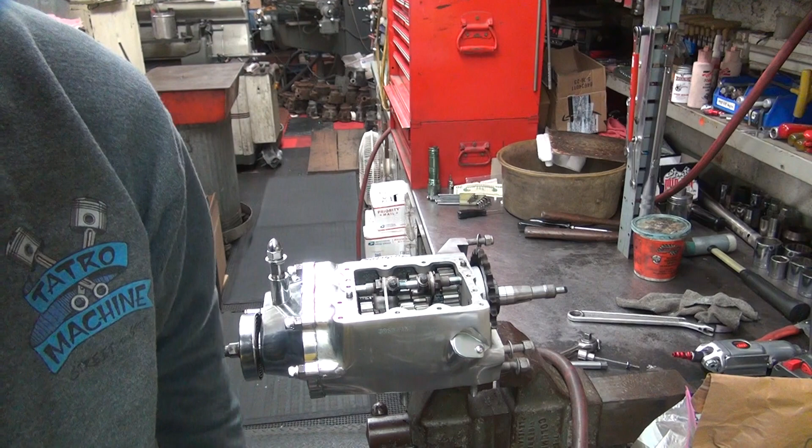Alright, we're back. We're going to put the top cover on now, so we've got to get our gasket gooped up. And the cover's over here.

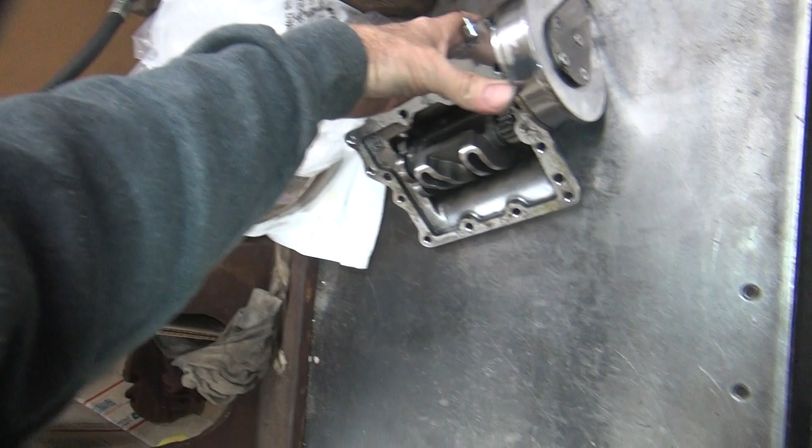Already trial checked to make sure it all shifted okay before. Right now we're in neutral. So we've got to make sure that this is in neutral over here. So that's in neutral, that one is in neutral. Make sure your bushings are on here too, like they're supposed to be. So those are all in there.

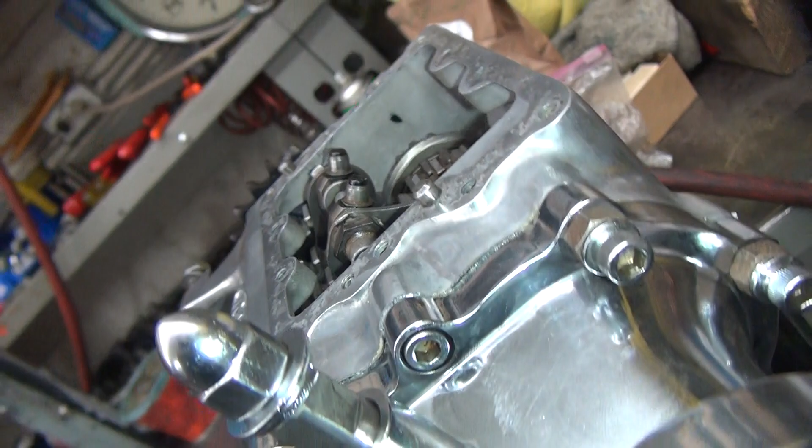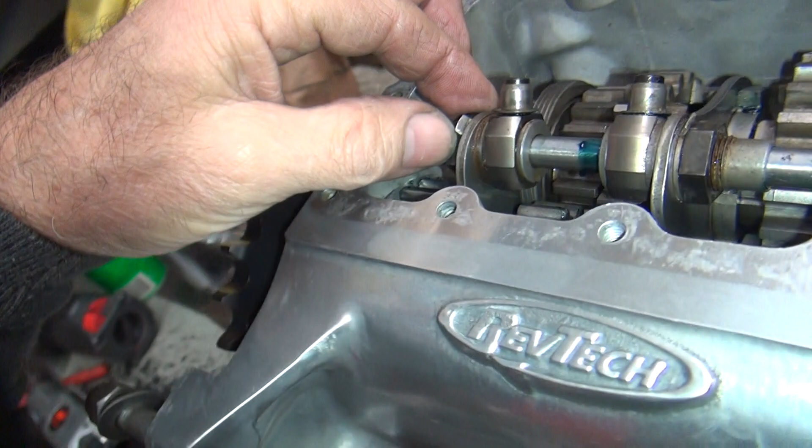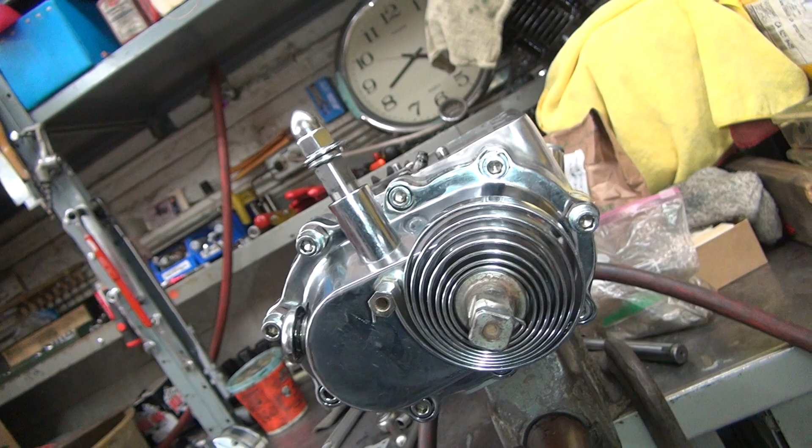Now why are our forks at different angles here? They're not supposed to be at different angles like that. That's weird. That is not good. Huh. I didn't notice that before. That's at a completely different angle than this one. They are not supposed to be at a different angle. That means something is put together wrong.

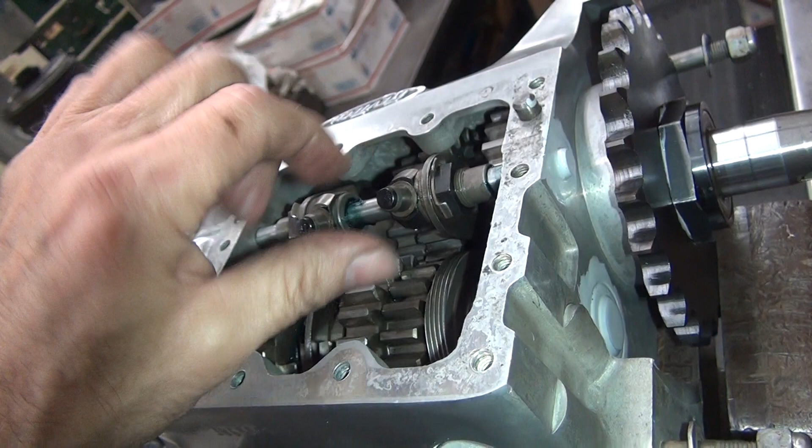That is not good. It's a hell of a time to find out about that because it's all buttoned up. I've got to completely pull things apart to change that out. These here can go on in two different positions, 180 apart from each other. It'll change where the angle of this is. So I'm guessing this one's wrong. It's too low. This one looks more correct.

So if these are in the wrong angles, they don't engage up here correctly. That means I've got to undo the sprocket, pull this goop all off, put it back on there, and then I've got to redo the goop too. But yeah, that's a hell of a time to find out there's a problem. This one's so darn low, it's not really going to engage correctly.

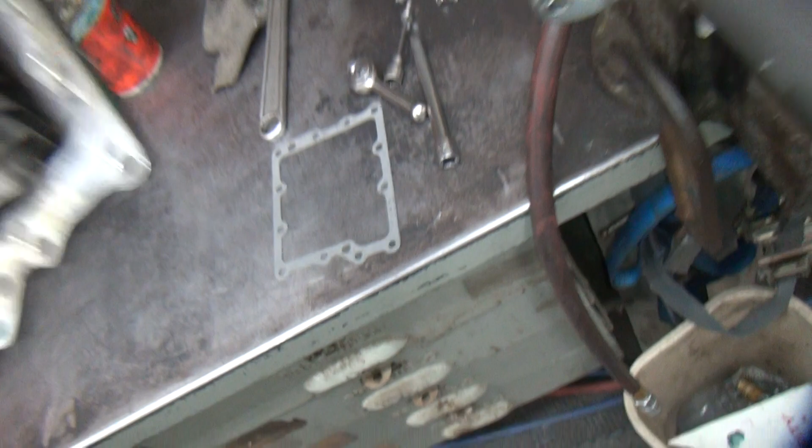See how it's not going directly into the drum? It's angled way forward. This one over here, on the other hand, is probably going in a lot straighter. Even it's a little off too. Yeah. That one's way off. Well, that's a sucker.

Nothing like having stuff put together wrong. These were put together wrong. I didn't notice that before. I should have noticed that. It's pretty obvious it's off. Oh well.

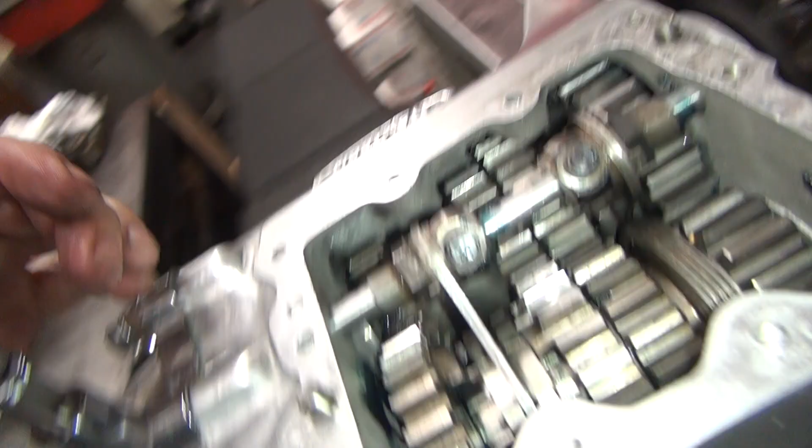Time to redo stuff. Okay, I'm going to have to go find me a book and double check on what that's supposed to be. One time a service book comes in handy. If I had to guess, this one's off, 100%. This one here is off. And there's no way of fixing it until you take the whole shaft out, which means the sprocket has to come off too.

But luckily all this other stuff doesn't have to come off. It's going to be a little bit harder to get the shaft out with all that glue on it, but I'll manage. Hopefully. The pin for getting that is over here, so hopefully I don't have to pull that back off too. Alright, yeah, I'll be back.

Okay, I've got my service book here. This is the genuine Harley one from 1974. And this one here is one of Dad's old copies he used to sell. I've got a few left too. These are the Knucklehead book from '40 to '47, service manual.

So this book didn't have squat in it. If you can't find what you need, go to an older book - that's the key. This book here talks about the shift forks, but doesn't talk about how they're supposed to be. So if you go in here, read all about it. There's the forks out.

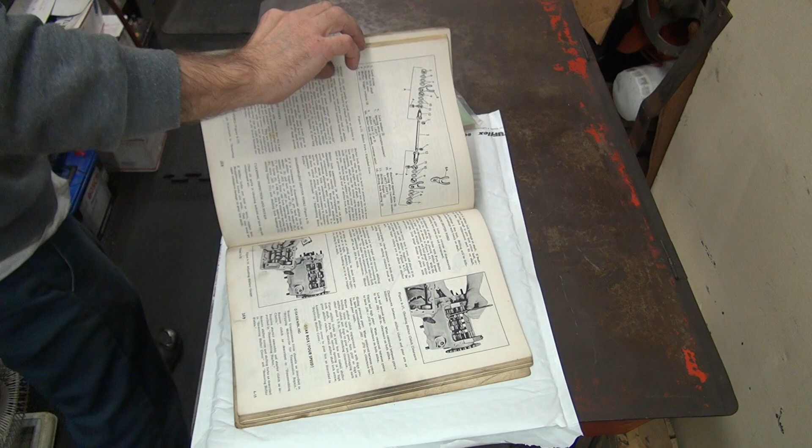Shift forks right over here. So they talk about... problem with old books is you don't want to fold them down too far, they break the spines out of them. Let's see, I'll put this over here.

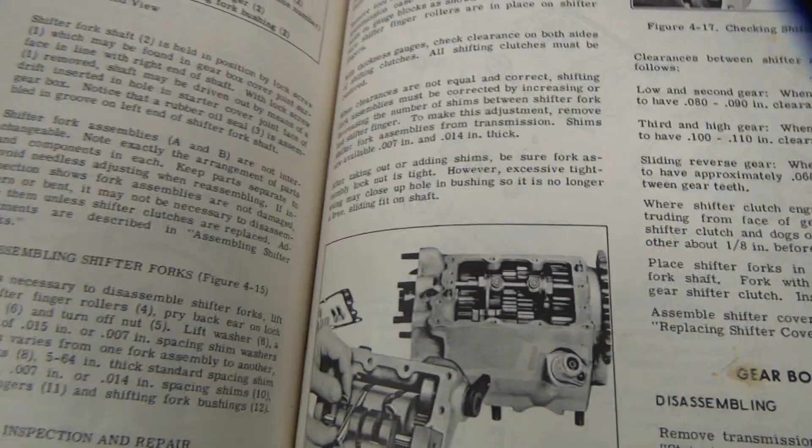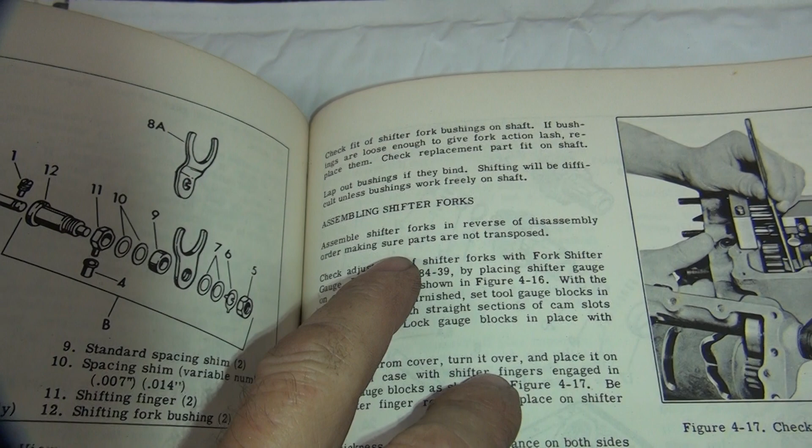There we go. I'll turn the light off. Yeah, maybe have it on. So over here, it tells you how to take them apart, inspect them, and then for assembly it says: assemble shifter forks in reverse of disassembly order, making sure parts are not transposed.

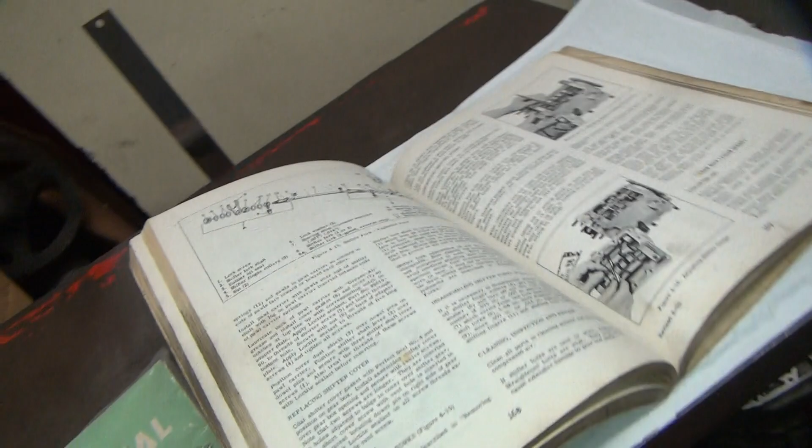Oh, you mean like flipping them upside down backwards? You mean like one of these is? That is the extent of what they tell you to do about that. They don't tell you any kind of reference on what is correct or not correct. There's no pictures, so you're pretty much up your ass - you ain't got nothing.

They're screwing you. Okay, so that's the 70s book, which is a copy of a 60s book, which is probably a copy of the older ones. But we're going to go ahead and pull out the old book. Old books tend to have more information because people actually worked on their bikes back then, unlike the new ones.

So this is one of Dad's books. These were made back in the mid-70s, up in LA - I think they're made in Santa Ana. Dad bought a bunch of these back in the day, so these are copies off an original book. It has really good pictures on them, nice glossy books, real nice quality ones.

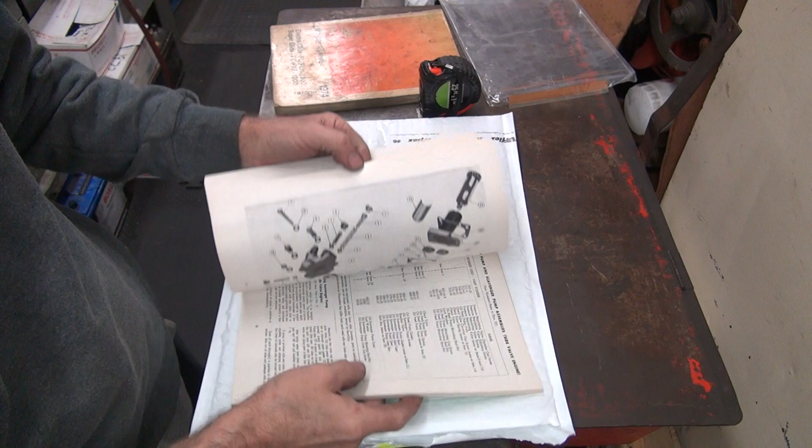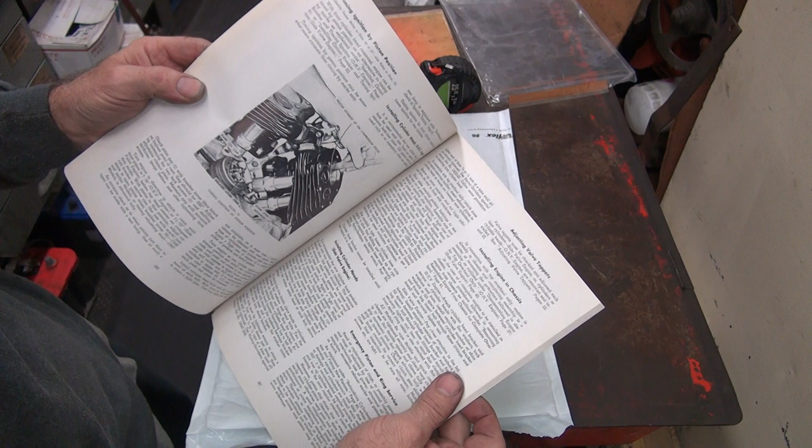So even though it's a Knucklehead book, it has a lot of 45 stuff. These pictures here are all 45 bikes. It also has the UL mixed in here too. So let's go to the transmission section. Yeah, see there's a Knucklehead right there. See, it looks like a 45 flathead, but no, it's a Knucklehead. Yeah, sure it is.

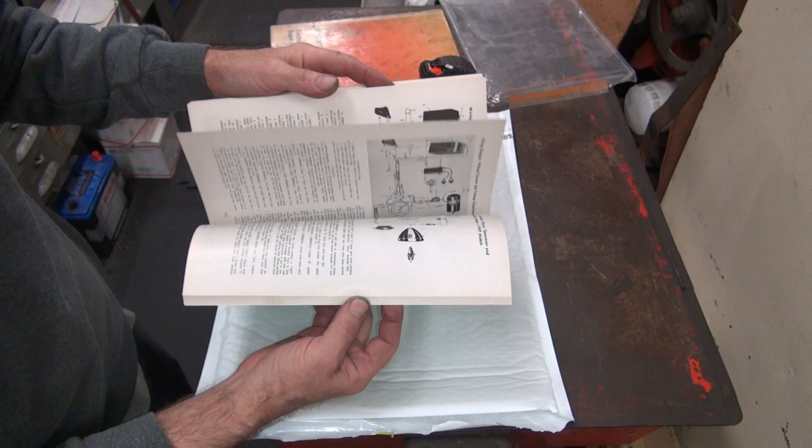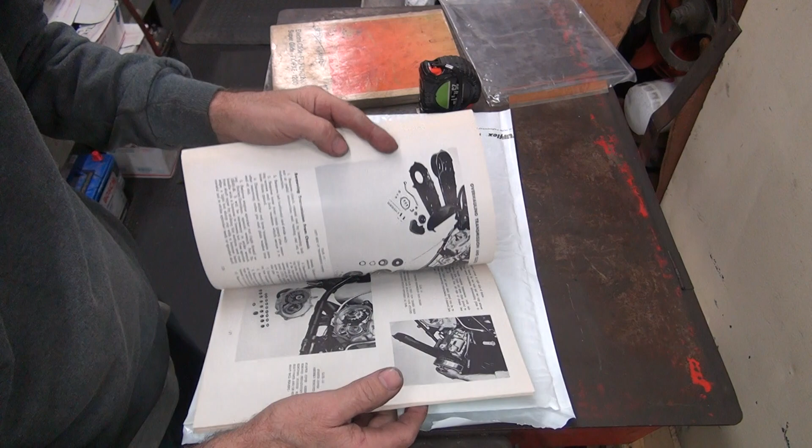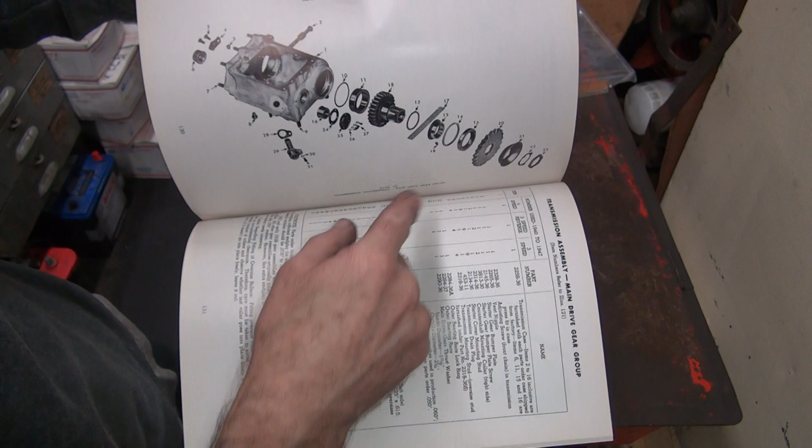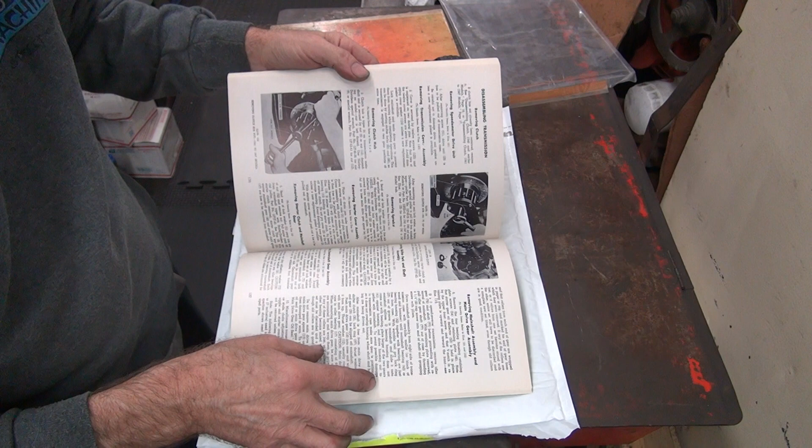Okay, let's see here. Shift forks. Removing shift fork. Removing cluster gear. Remove counter shaft. Look how nice it's laid out so you know exactly where you are. Inspecting parts. Removing shift fork shaft bushing.

Let's see - each section of cover not to exceed 300 degrees. You're not supposed to heat it up to more than 300 degrees. That's nice. Tap on it with a wood block. Clean all parts.

Here they're talking about slots and grooves. Okay, inspect all bushings and bearing races for worn or excessive conditions, give close attention to rounded condition on shifter engagement dogs and gear engagement dogs. Okay, that's about shift dogs.

Tell me what I want to know. Just telling you, looking for bad parts. We already did all that.

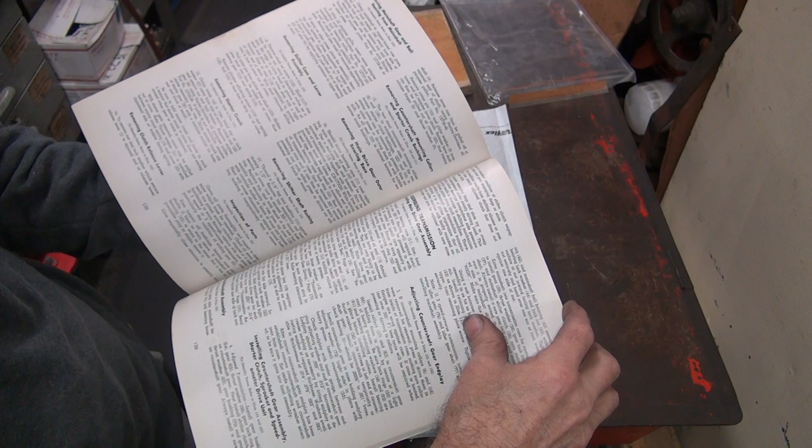Installing counter shaft, installing shift forks.

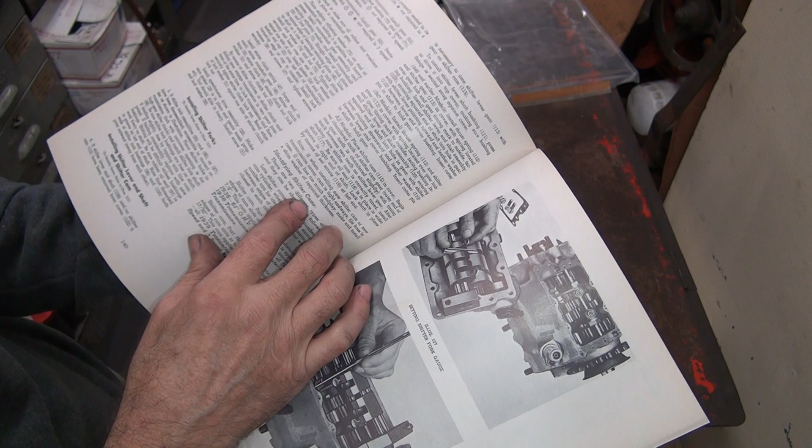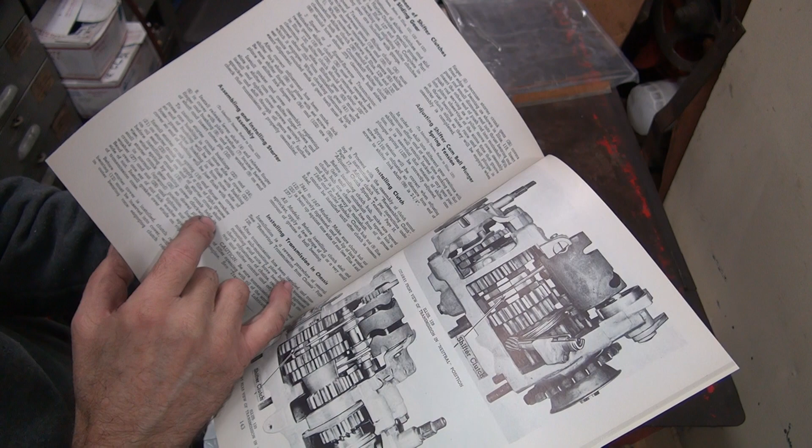They don't tell me either. We got a lot more detail in here, but it's not telling me what I want to know. It's all about the shifter cam. Yeah, I didn't really tell.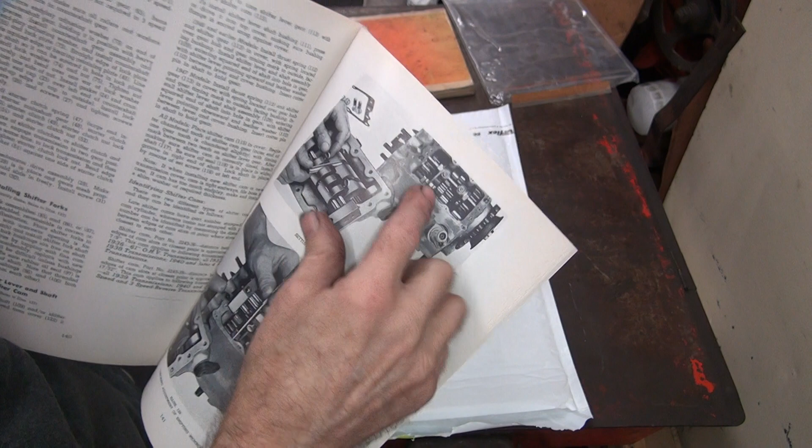They told you which way to put the bushing in on the shaft up here, with threaded parts to the outside, which we did. They didn't talk about which way the finger goes onto the bushing sleeve, which is what I want to know. That is the key.

Alright, well, let me look through this a little bit better. It's going to be a lot of reading here. Alright, I'll be back.

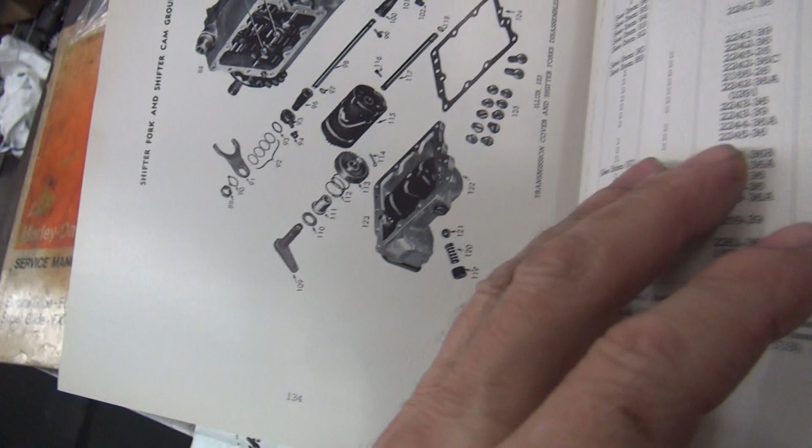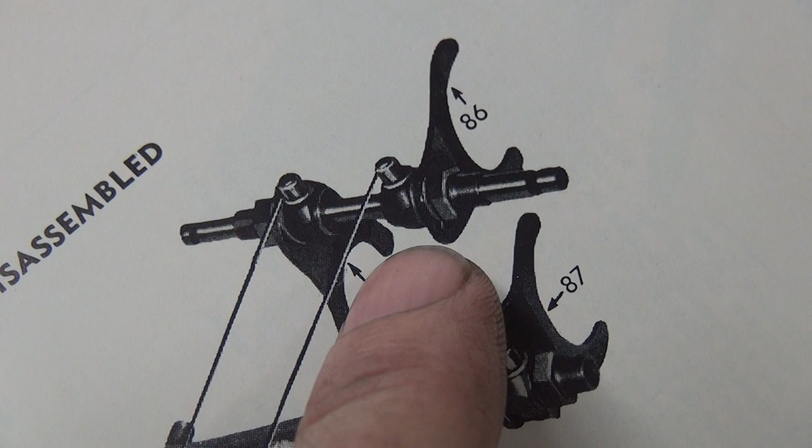Okay, so after reading all that stuff, they sure didn't tell you, but they said look at the pictures really close and you can tell which way things are supposed to be. So here are your fork assemblies right here, but you can't tell the angle by looking at a picture at that angle. You can't see what the slot is right here on that piece, or that piece, to tell which way they're supposed to go together. So it makes it really difficult to figure out.

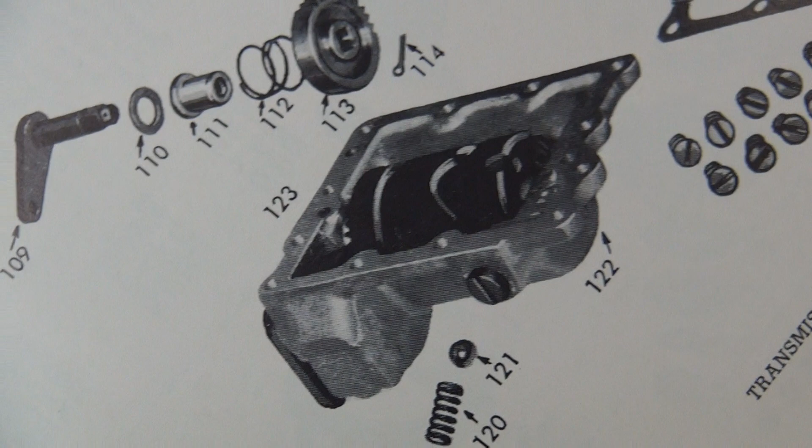Now you can see the slot in this picture here, see the slot going across, but you don't know where this one is relative to that.

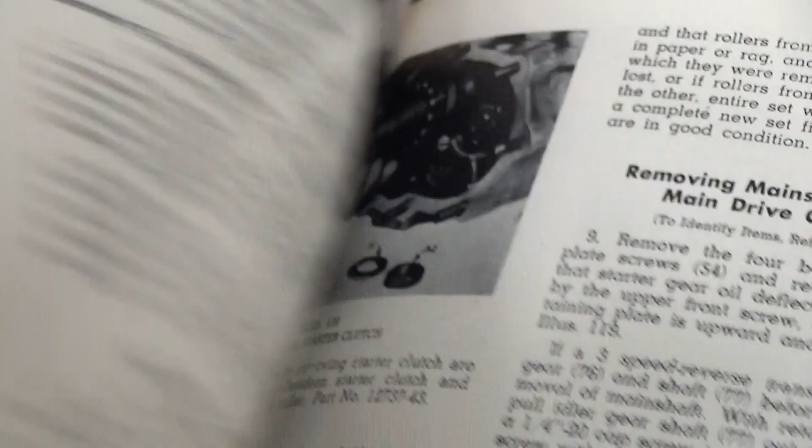They tell you how to use a 100 thou thickness gauge on the high gear and 75 on the low gear to set your shift fork alignment. They never tell you about that stuff in the newer books, so these old books have a lot more detail to them. They got a lot of good pictures here showing what stuff looks like, but you can't really see the angle of what this stuff is supposed to be at from these views.

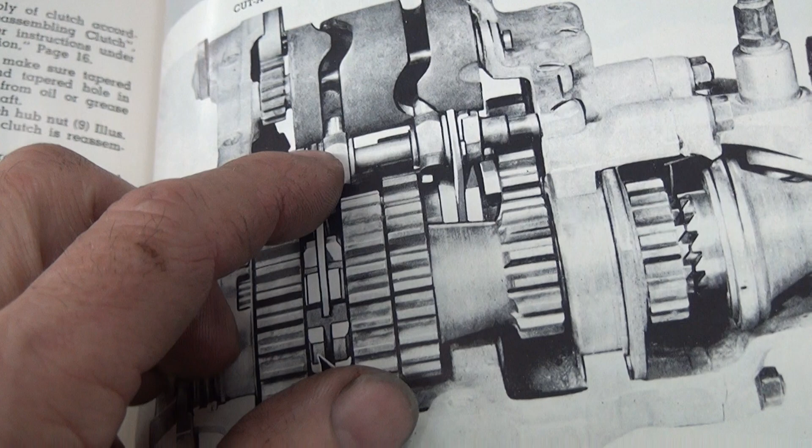So all I know is I want this pin to be perpendicular inside that drum when it's assembled correctly. I do know that for sure. That's what I want. The problem is they don't tell you what that actually is. They give you a lot of good information in that book, but not enough. This book here has about a third of what this has for information. It's the same tranny.

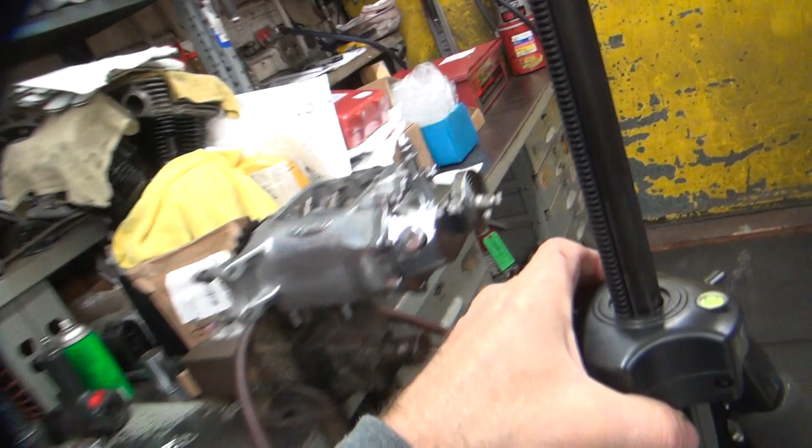So it makes a difference. Right now, one of these two is off. If I had to guess, it's this one. Now, what I don't know is how do you tell what the angle of this thing is when it's assembled.

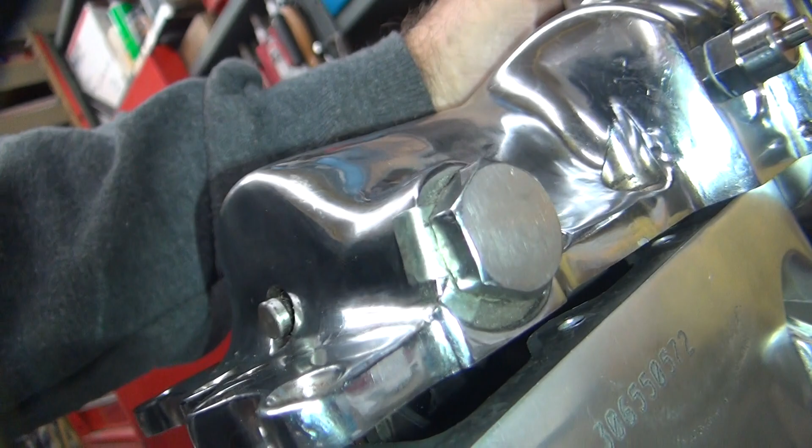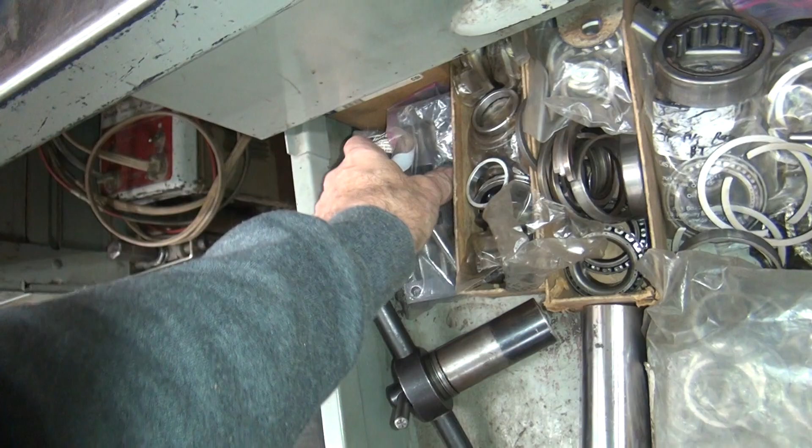No way to tell. I don't know how you would tell. So that's a big problem. Now if we use a tool, that's kind of a reference idea. Maybe that'll tell me which way one's off. I don't know, all I know is one of them's off.

Now, I don't have a lot of parts laying around here at the shop, so finding original parts is going to be hard to tell right now. Now we know this goes on here like this, it goes on there like this. There we go.

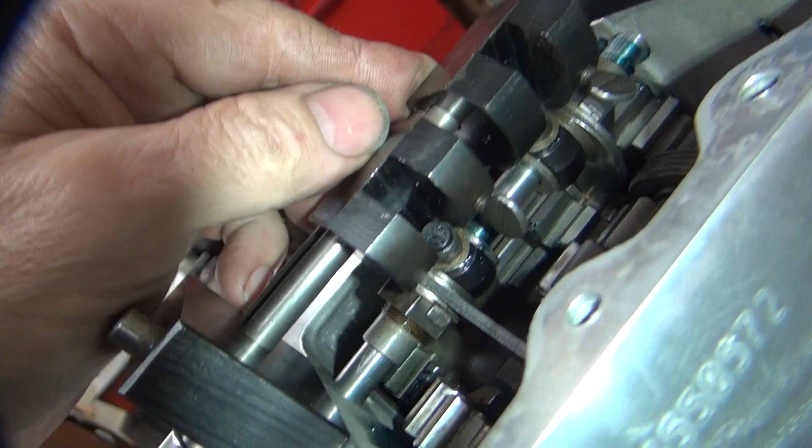So which one's off? This one's pointed downhill, this one's right up against the surface where it's contacting really nice, but which way is it supposed to be? I don't know. So once again, if I had to guess, I'd guess that one's probably correct. But I don't know at this point. That is the problem.

So what I'm going to have to do is go on a search around here and try to find some more parts that are known to be correct. And I got one transmission in pieces that's buried in here, I have to go dig it out tomorrow.

Now this is not dragging in there, see, it's free, it's got clearance on it, see? And it's perpendicular to the way this thing is cut. So if I had to guess, I'd say that is definitely the correct way. That one's correct. This one over here, if I had to guess, is the one that's wrong.

So if this is the shape of the barrel of the drum, you can see how it's trying to come out of the drum, whereas this one's poked up in there pretty good. So once again, I think this is the one that's wrong. But how do you prove it? That's the problem.

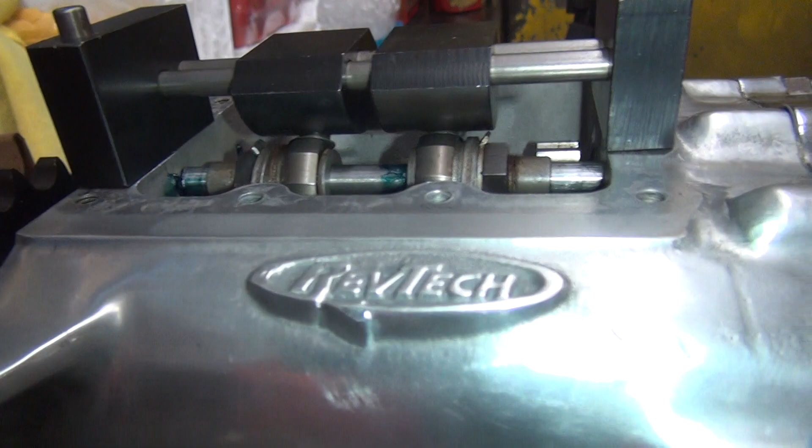Yeah. Good question. Alright, to be determined. We'll have a go at this again tomorrow.